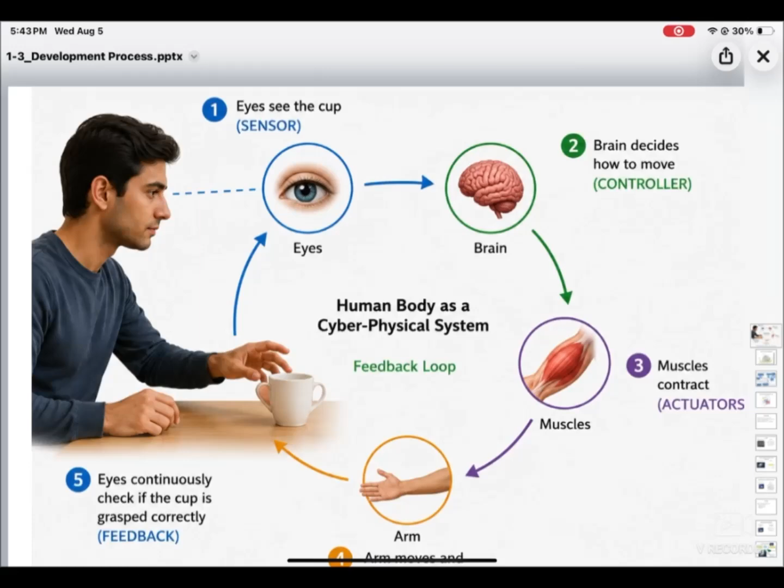So in the last class we studied about cyber physical systems compared with a human body. For example, just like a human body, we have eyes which work as a sensor. Eyes see the cup, and then we have a brain. Brain decides how to move - that acts as a controller. Then our muscles contract to grab the cup - this is how actuators work. Our arm moves and picks up the cup. That's what the plant is - plant picks up the cup, which is our physical world.

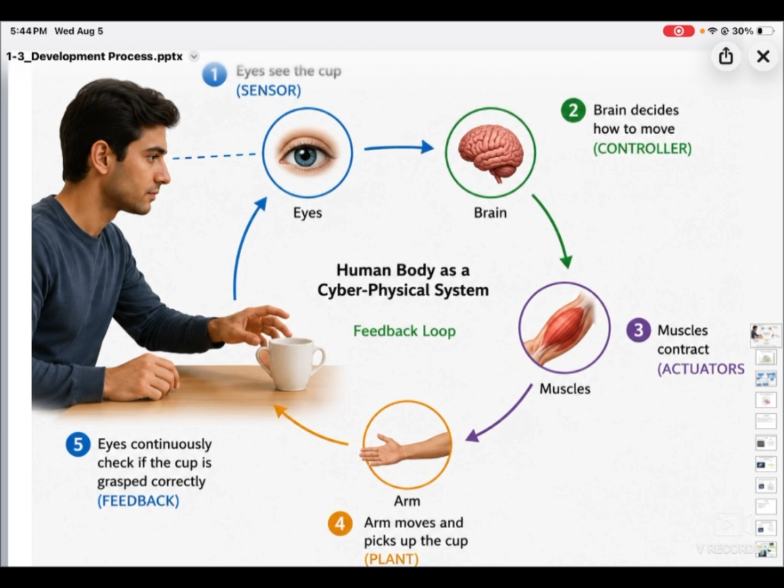And what about feedback? Eyes continuously check if the cup is grasped correctly or not - that's how feedback is generated. That's a relatable example you can take. We have taken the drone example too. So let's move next.

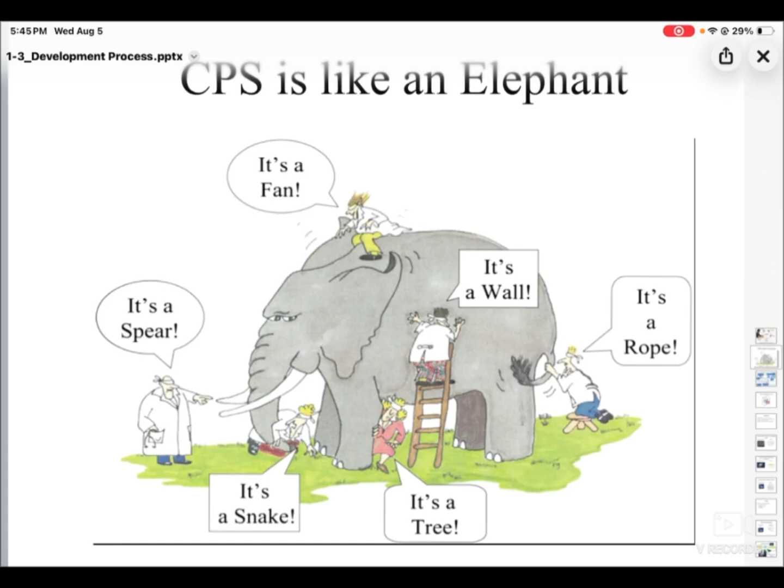CPS is like an elephant. These people are blindfolded, and the one touching the elephant's ear is saying it's a fan. Someone touching another part says it's a snake. Someone says it's a rope. He's touching the tail, one is saying it's a wall, one is saying it's a tree.

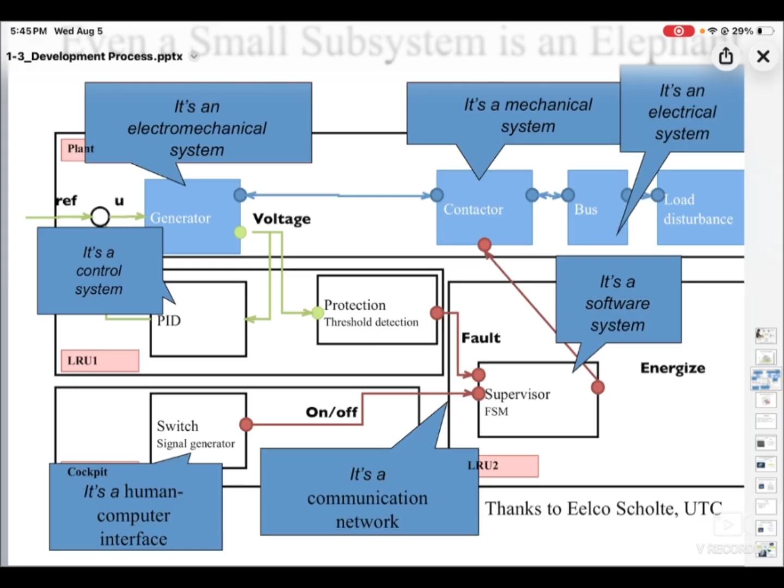Our CPS is made up of small subsystems. It could be an electromechanical system, a control system, human computer interface, a communication network, or a software system. It could be made up of multiple subsystems and form a cyber physical system.

So next comes the development process. To develop a cyber physical system, it's not a straight line system - it's an iterative system. What does an iterative system mean? Like creating a model, then designing it, and then analyzing it. It's not a straight path. You can find a problem during modeling, or once the model is created you can find it during designing. So you have to move back and fix the problem.

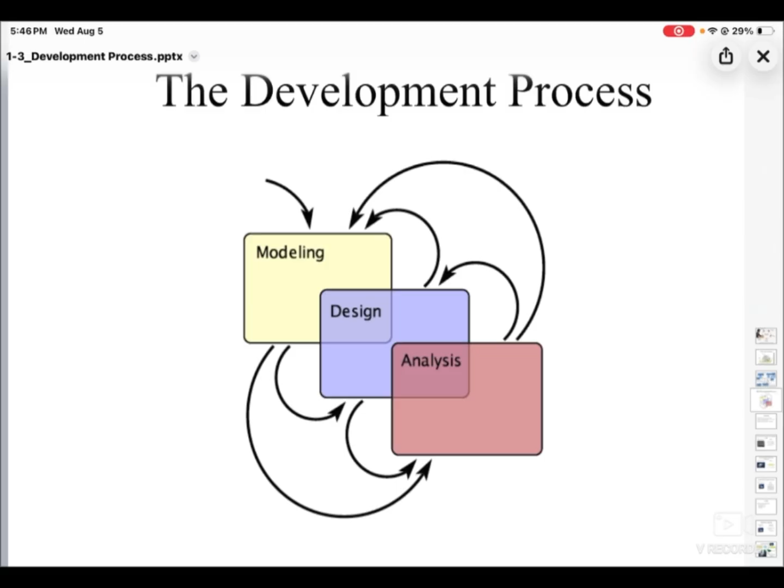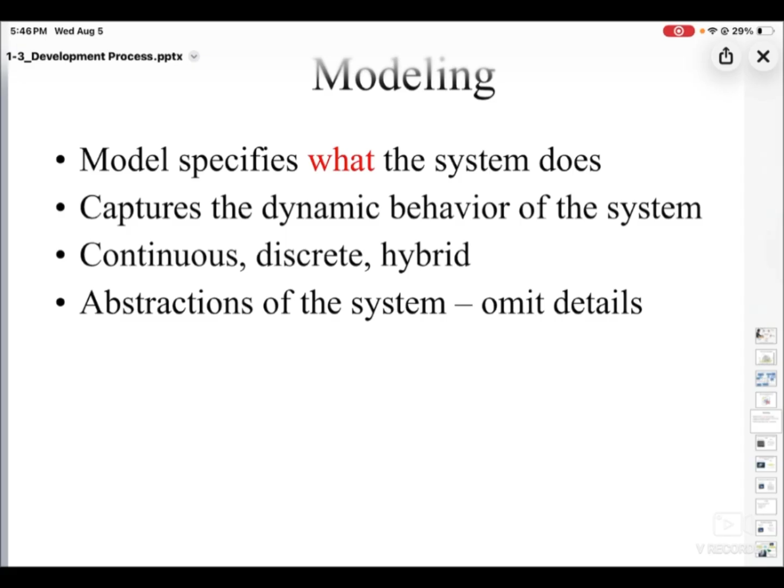Modeling: a model specifies what the system does, capturing the dynamic behavior of the system. A model could be of three types: continuous, discrete, and hybrid. Let's see one by one.

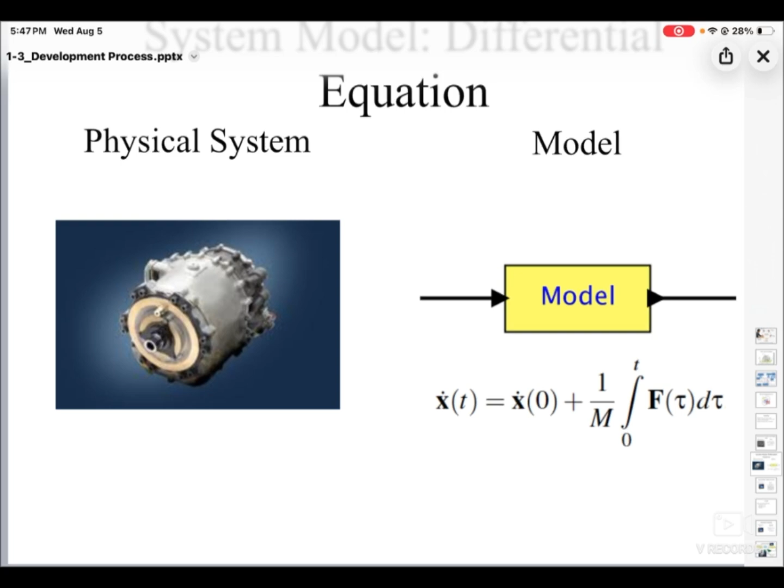What does a continuous system look like? So this is the physical system model - an engine. For example, we have a helicopter and this is its engine. We model it using differential equations because it changes over time. It's a continuous process - it attains some RPM at some given point of time. Initially it's 0, then some RPM, for example 12 RPM, then 200 RPM, 300 RPM. So it changes - to model this physical system we use differential equations. We will see this later how it's made and all.

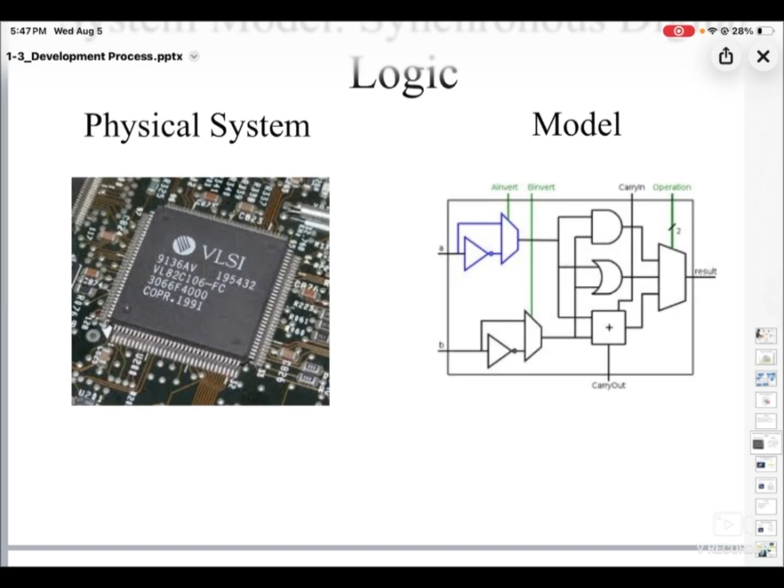Then there comes the hybrid system. Hybrid is a mix of both discrete and continuous signals. You can see the synchronous digital logic - like this is the chip, there are some gates made using Logisim. So yes, you can create the digital logic - it's a discrete system. Then comes the hybrid system - to model this we use automata, theory of automata.

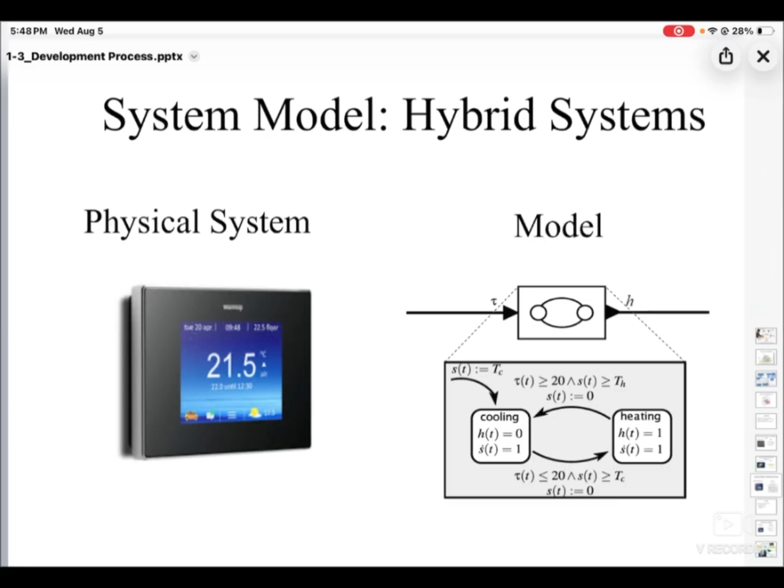So yeah, there comes the design part. We will study them in detail.

For example, if I take an autonomous drone example - first we model it, then design it, then analyze it. It's not a straight process, it's an iterative process. You have to move one part backward if you find an error or problem in the first part.

For example, modeling an autonomous drone - it's simple. You create a mathematical or logical representation of the drone. You design the controller and then you analyze it.

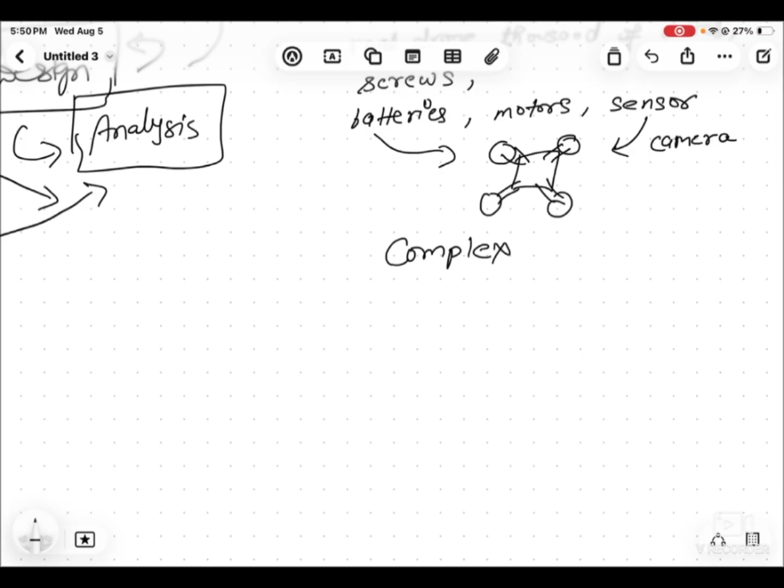So talking about modeling of a drone, the real drone has thousands of wires, it has screws, it has some batteries, it has motors and sensors. If it's a quadcopter, it has four motors, propellers, sensors - for example we talked about camera, batteries. If we model all of these, it will be a complex thing if we have to design each and every screw or wire, etc. So we don't design and model all the things from scratch - we just reduce the parameters and look upon only those parameters which we need to work on.

So then comes the design part. For the drone, we design the controller using Simulink or whatever you use. If you are designing a drone model, you use CAD. This is the design phase, we design it.

Then there comes the analysis part. In analysis, we test it - we test our model design. So what questions we ask during analysis: is your drone stable? Second, does it crash? And third, is it fast enough? So analysis totally depends on you, like for what specific purpose you want to design or model this drone.